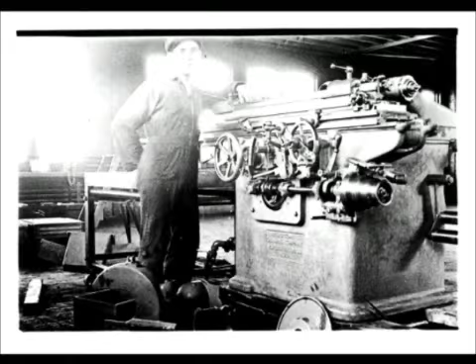In 1927, while competing in a soccer match, Herbert broke his leg. This event was the impetus for Herbert to reevaluate his career, a process which resulted in a move to Detroit to take part in the thriving automotive industry.

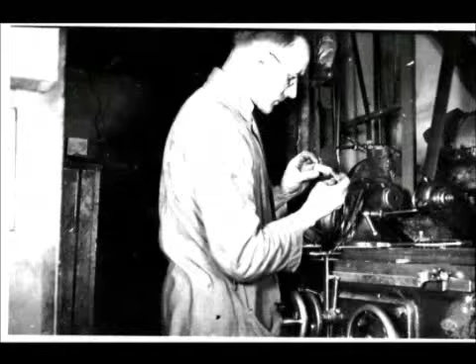He spent the next several years working at a series of jobs, including a position at Cadillac Motor Company, and refining his skills in the art of machine building.

In January of 1932, Herbert married Martha Dieter, his next-door neighbor from Germany, who had also moved to the U.S. Martha would provide Herbert the support that he would rely on for his future successes.

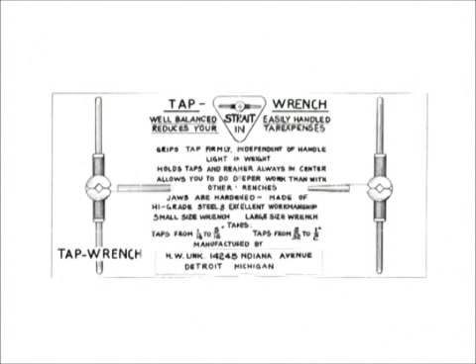During the Great Depression, Herbert began making tap wrenches and spent his weekends selling them door to door. In 1935, he officially established Link Engineering Company in the basement of his house. Tap wrenches and edge finders made up the company's initial product line.

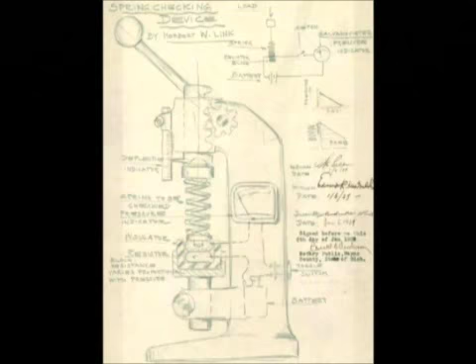In 1936, Herbert acquired a patent for a spring testing device. He then began producing the testing devices and identified a market of willing buyers. Business continued to grow, and Herbert relocated to a storefront near the Fisher Building in Detroit.

In the early 1940s, construction of the John Lodge Expressway forced Link Engineering to move out of the storefront and into the company's first standalone facility on Elmira Street in Detroit.

Herbert continued to expand the business and brought in key players such as Lee Doughty and Bob Frederick, launching what would become long-standing careers with the company.

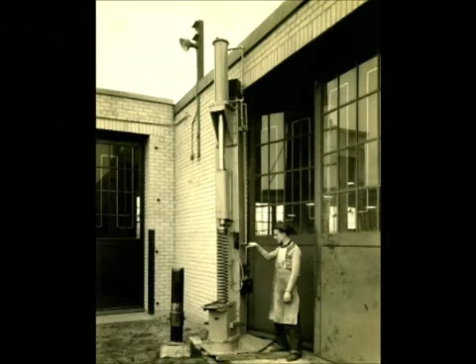During this period, Link acquired the United Electric Company from General Motors, providing an entry to the electric motor repair business. In the mid-1940s, Link hired T.P. Chase after his retirement from GM

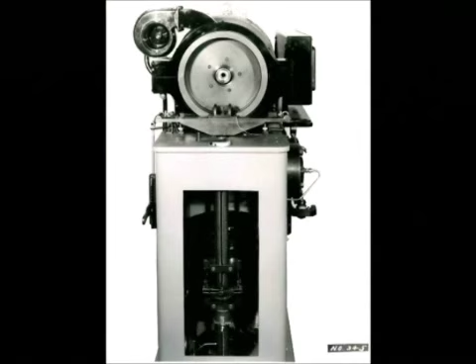and Link and GM worked together in developing the Chase machine as a method to assess friction material characteristics.

Already the proud parents of 3 daughters, in 1944, Herbert and Martha Link were thrilled to finally add a son to their family. In due time, Roy would come to lead the company into the next century.

Stuck in a severe heat wave, in a summer in the late 1940s, working conditions at the Elmira plant became unbearable, and employees felt the strain.

At the end of one of these long, hot days, Herbert announced to the employees that everyone should bring their swim trunks into work with them the following day. On that next day, the workers established a company picnic outing that would turn into an annual tradition at Link.

It continues to serve as a family-oriented event where coworkers are able to relate to each other outside of work and enjoy good times with one another.

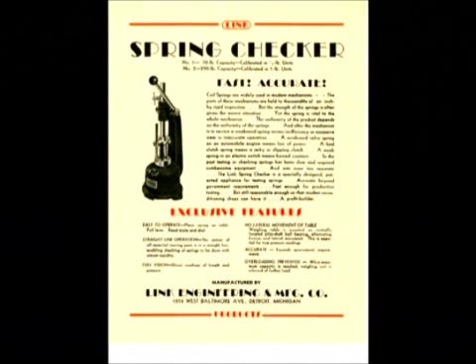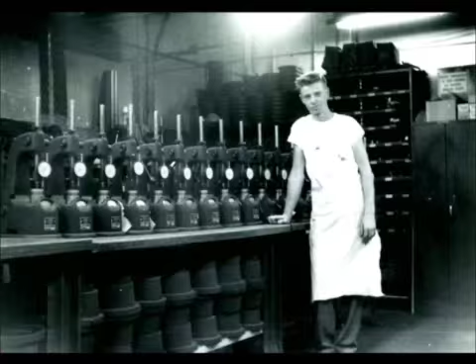Through the 40s and 50s, Link's spring testers became a booming market. They were sold at a higher rate than ever before, allowing the company to produce multiple stands at a time. The division would eventually be led by Dave McGee in sales and Harold Palmer in manufacturing.

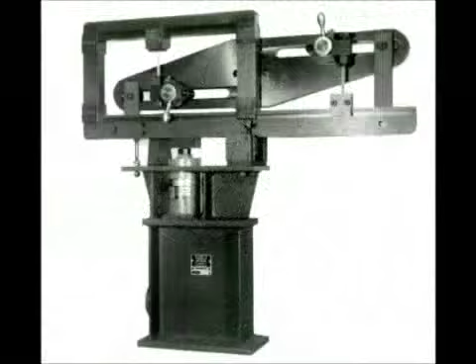In addition to this business, the company also began developing pump and motor test systems, including its patented Unibeam, designed by Milt Weber, which measured torque before there were electronic transducers.

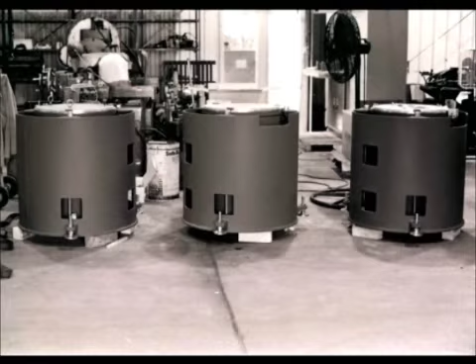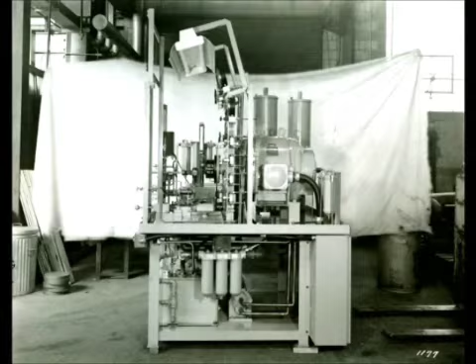Pneumatic air mount systems were made to isolate machine bases and seismic blocks from transmitting vibrations while maintaining a level surface. Hydraulic test systems for accumulators and power units were also produced by Link for companies such as Vickers. Link was becoming a wide-range provider of test solutions.

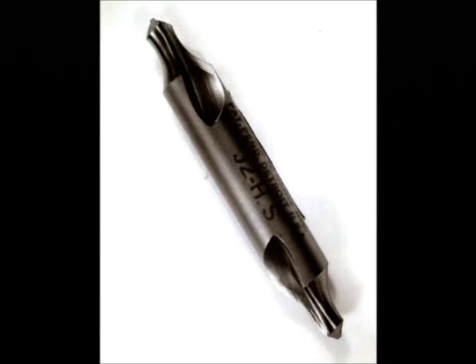In the early 1950s, Herbert Link developed a technique for simultaneously machining both flutes of a center drill cutting tool. This launched Link's involvement into the cutting tool industry and led to the establishment of Link Industries in Indian River.

Located in northern Michigan, the building would serve as a machining facility to produce center drills and custom cutting tools, and it is still in operation today.

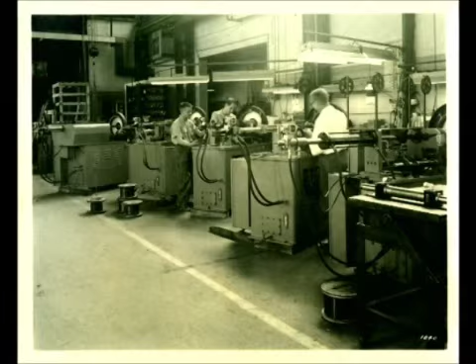Fred Glock came from Delco in Dayton and was responsible for the facility in Indian River during its early years.

It was here that Link developed the company's first winding machine for electric motor stators. These systems soon led to the development of the stator lacer machine, cam-driven stitching systems used on electric motors.

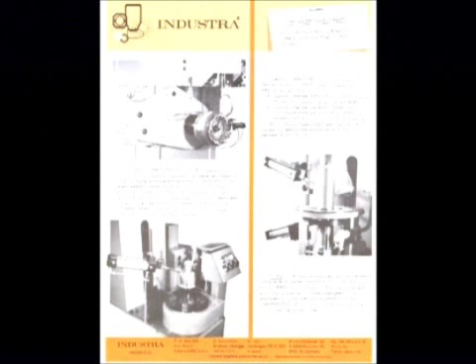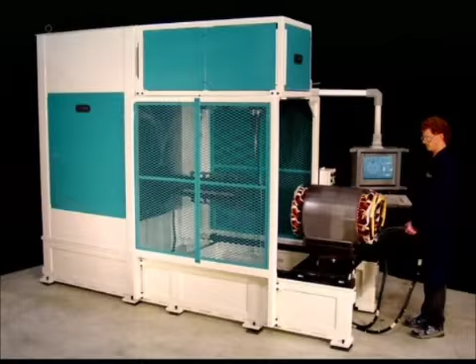At one point, Link built stator lacers, accounted for 90% of the industry's lacers worldwide. And through the management of Warren Brown, these units still significantly contribute to Link's operations to this day.

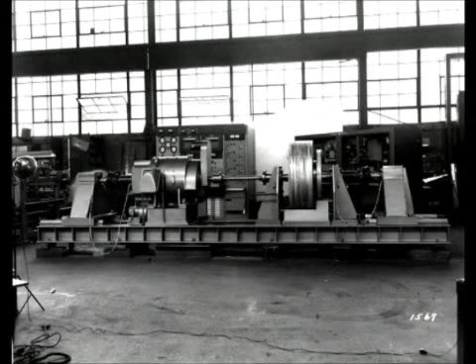In 1961, the company designed and manufactured its first inertia-type brake dynamometer for Kelsey Hayes.

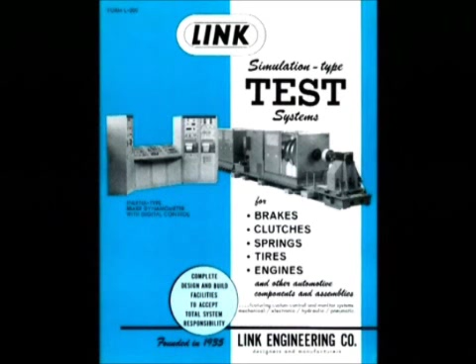This dynamometer, followed by a few more over the next several years, provided Link the partnerships that it desperately needed with the local, thriving automotive manufacturers, partnerships that continue to be the cornerstone of Link's operations today.

In 1971, after receiving degrees in engineering and business, and after a 3-year stint at Burroughs, Roy began working full-time for his father. Through the support of his wife, Dawn, Roy quickly became a tremendous asset to the company and to the industries served by Link. Roy was named CEO-President of Link Engineering Company in 1989, a position he still holds today.

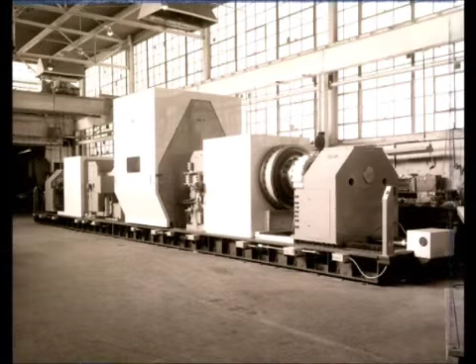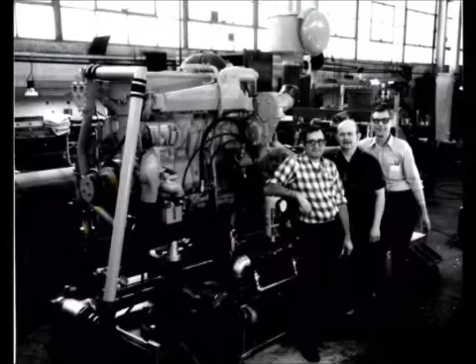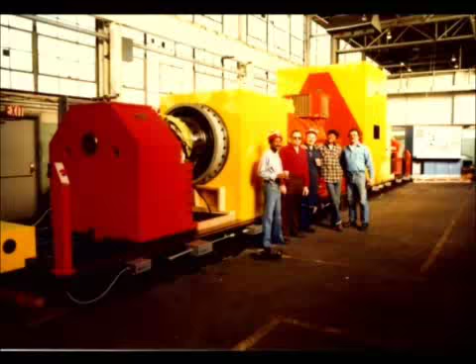The early and mid-1970s served as an era when Link became highly involved with producing large dynamometers, primarily for the heavy truck and off-road vehicle industries. Customers included GM Truck and Bus, Bendix, BF Goodrich, Brakes India, and Raybestos. While Link was now building test systems larger than ever before, it continued to improve upon its operational efficiencies.

John Sarnick, who was a key contributor to the success of these jobs, would become the operations manager in the mid-70s, and today John holds the title of Executive Vice President.

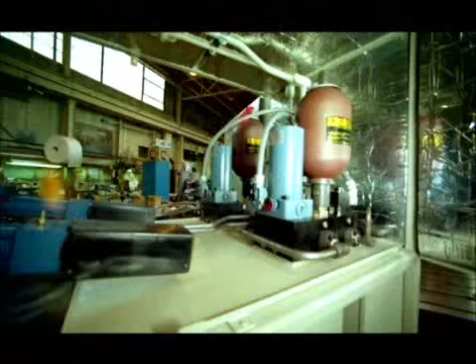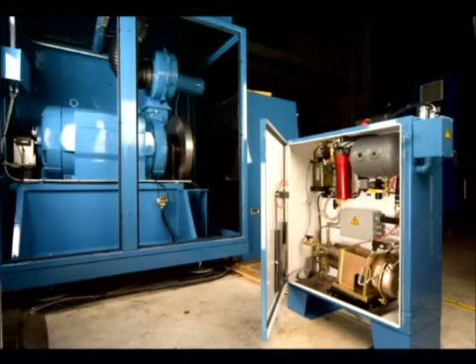Link Engineering has produced a wide variety of control systems through its history. Guided by the leadership of Tim Olix and Dan Sharada, beginning in the mid-70s and continuing to this day, Link's control systems have evolved to keep pace with the needs of its customers. Through the evolution from relay control to discrete solid-state logic to microprocessors and then to fully computer-based controls, Link is recognized for its innovative and user-friendly operating systems.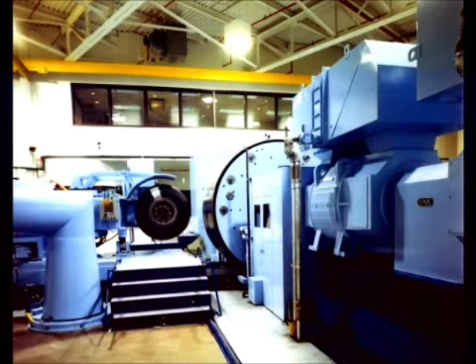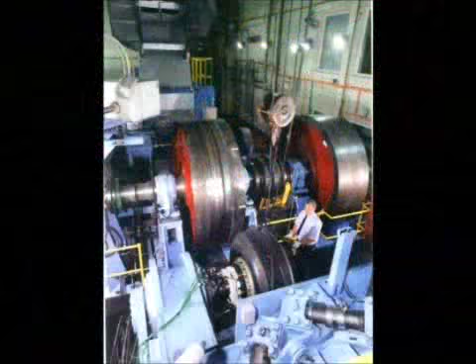The 1980s brought another level of development for the company. In the late 80s, Link won a bid to design and construct an aircraft brake dynamometer for Allied Signal in South Bend, Indiana. This project would lead to other aircraft test systems built by Link and installed at facilities around the world.

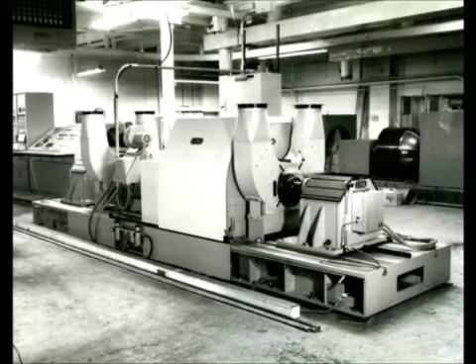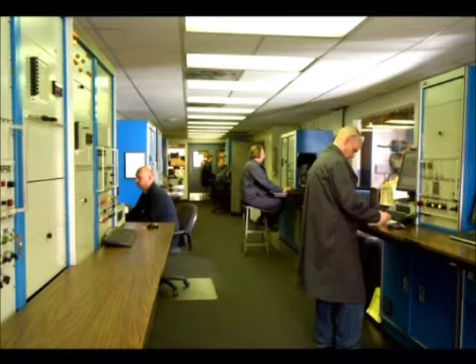In 1988, through the oversight of Frank Dane, Link Testing Laboratories was founded in Detroit as a means to offer independent testing services at the automotive component level. It would develop into an extensive lab serving the testing needs of brake system, transmission, wheel and hub, and other related automotive components. Customers quickly came to see the benefits that Link's expertise in testing services brought to them.

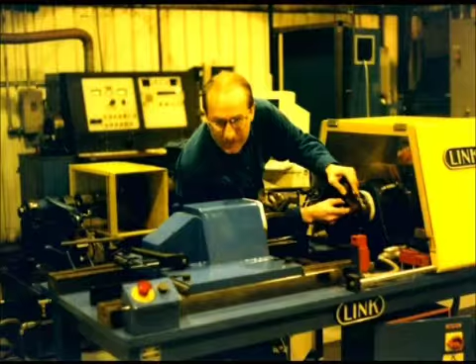Soon, through the leadership of Tim Duncan, Link had to add more employees and dynamometers to the Detroit facility in order to keep up with the demand.

Herbert remained active in, and in fact at the forefront of the business, all the way until his death in 1989. By the early 90s, with the test laboratory continuing to expand, Roy purchased land in Plymouth for development of a new design, manufacturing, and assembly headquarters.

There was now plenty of room for the test laboratory to expand, and expand it did. Today, Link has not only filled the Plymouth facility, it also operates dynamometers at several customer sites, as well as at its laboratories around the world.

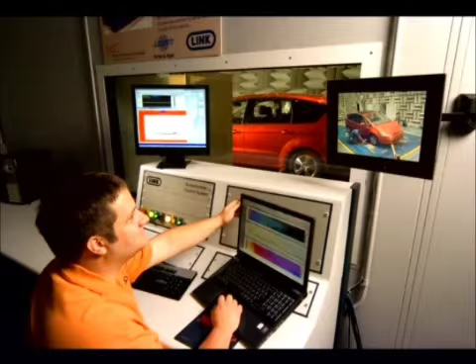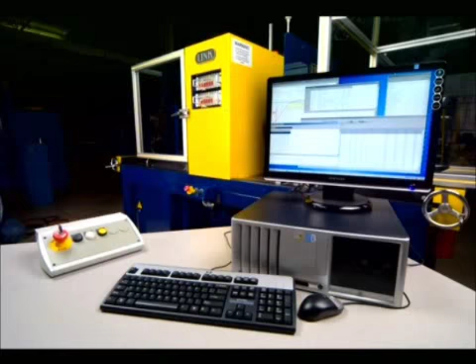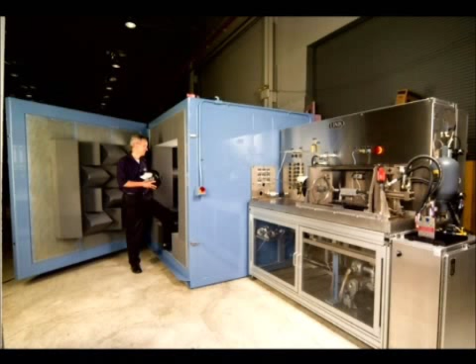In the mid-90s, Link's software department began developing a platform that escalated the company to yet another height. The Windows-based software, identified as ProLink, would act as the operating system for every Link test machine manufactured from that point forward. Its popularity with customers would also lead to Link offering control upgrades on competitors' test systems.

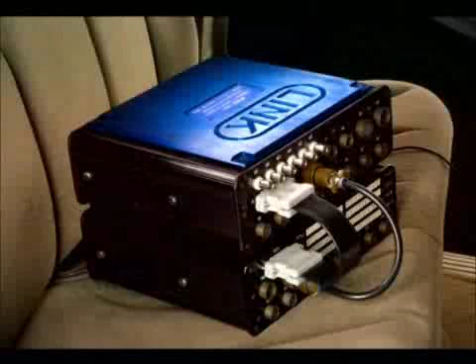Complementing the expanding demand for Link's laboratory testing services, the demand for vehicle testing was also rising. In 1993, through the leadership of Dan Mahana, Link established a vehicle test facility in Phoenix, Arizona. These operations have since expanded into support activities in Los Angeles, a vehicle test facility in Michigan, and a commercial vehicle test facility in Ohio.

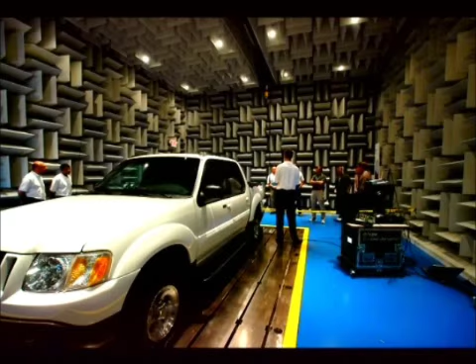The 2000s represented an era in which Link Engineering committed itself to taking the next step and evolved into a multinational company. A joint venture with SE Systems to create Link Test Labs Korea was established, as well as the opening of sales offices in China, Germany, Brazil, and Japan. Link has also established representatives in France and India. Link is now in the process of opening up laboratories in China, Brazil, and Germany.

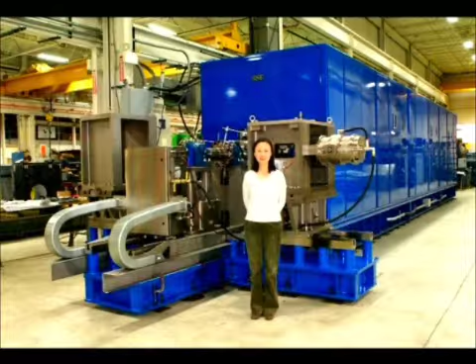This expansion has proven to be timely, as 2008 became the first year where more than half the company's revenue was generated outside the U.S. With Link systems installed around the world, and with markets developing abroad, Link is well positioned to support this activity and fulfill its customers' future needs.

Link has been successful due to the dedication, innovation, and overall drive of its employees. Through the leadership of both Herbert and Roy, and the emphasis on the importance of its employees and the quality of their lives, Link is proud of the numerous employees who have worked with the company for 20, 30, 40, even 50 years. It is this level of expertise that is responsible for the highly valued products and services that Link's customers have come to expect.